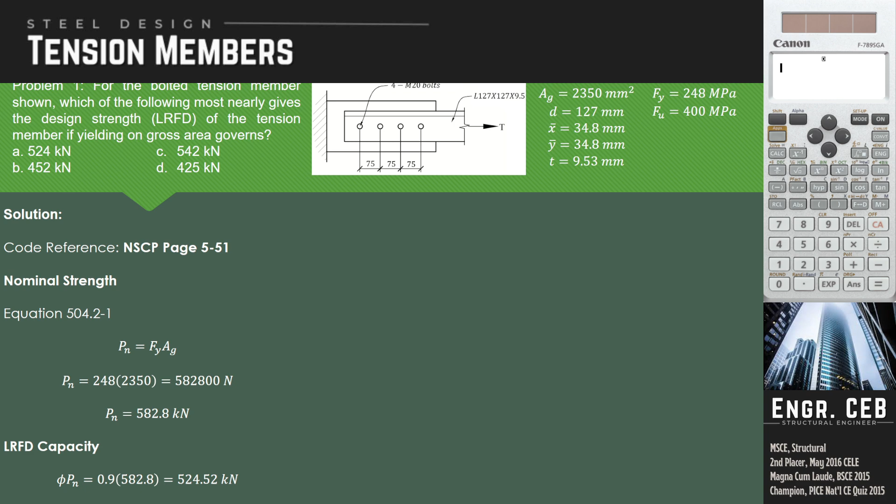So that is 582,800 Newton. We divide it by 1,000 to obtain the answer in kilonewton. This is the nominal strength. To get the design strength or the LRFD strength, we need to multiply this by the resistance factor phi, which is 0.9 for yielding on gross area. So 0.9 times 582.8 is 524.52 kilonewton, and that is letter A.

For the bolted tension member shown, which of the following most nearly gives the shear lag factor? We have a reference table where this will come from, and in determining the shear lag factor for this case, we will use case 2, and the formula is U equals 1 minus X bar over L. But there's a possibility that in the board exam this will be given.

The statement might say, use a shear lag factor of 0.85. X bar is the centroidal distance of the tension member towards the interface of the connection, so that is 34.8, given in the section properties of the tension member. Then L is the length of the connection, basically the distance between the extreme bolts in the line, from this bolt to this bolt.

The distance is 3 times 75, so that is 0.845333. For angles, we also have another applicable case, case 8A. For case 8A, the shear lag factor is given explicitly as 0.8 for tension members bolted with 4 or more fasteners per line in the direction of loading. We can see we have 4 bolts in the line, so the shear lag factor is 0.8.

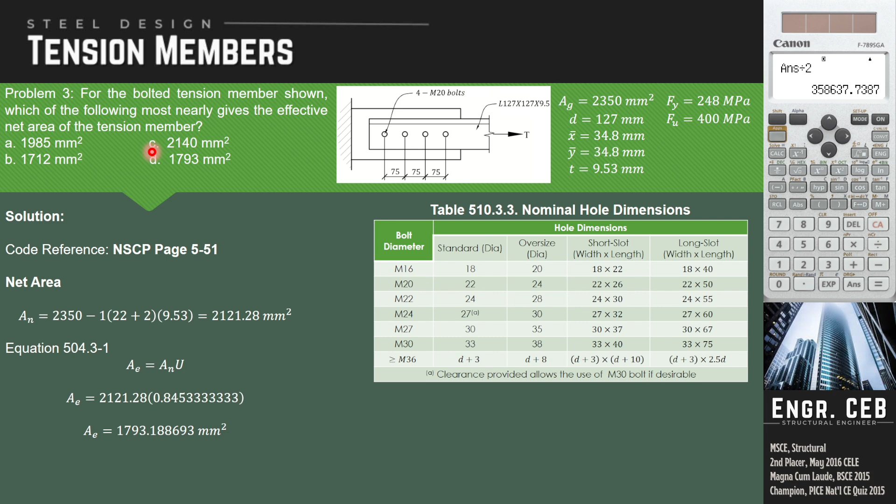So that is 2121.28, this is the net area. Ang question is effective net area, so pag sinabing effective net area, yun yung AE. Kaya ita-times mo pa yung net area ng U. So 2121 times the shear lag factor, that is 1793.188693 mm squared, and that is letter D.

After that, we can already determine the allowable strength for the fracture on net area. We just determine the nominal strength, so that is Fu times AE. So we will obtain 717,275.4773 Newton. After getting the nominal strength, we divide this by the factor of safety for tensile rupture or fracture on net area.

So that is 358.63 kilonewton, and that is letter A.

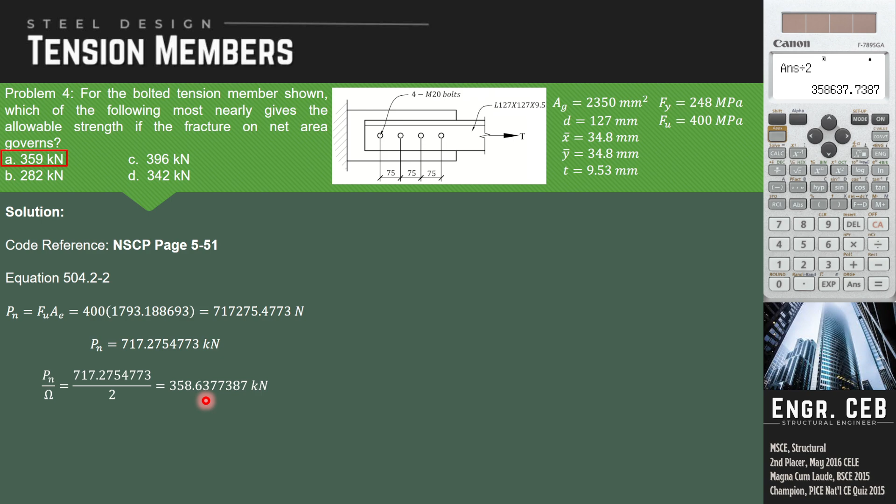Next, for the welded tension member shown, which of the following most nearly gives the shear lag factor? This will fall under case 2. But in determining the L, as you can see, magkaiba kasi yung length ng weld along the longitudinal direction natin. Dito 150, dito 100.

So in determining the L, we should get the average of 150 and 100, so we just get the sum, 150 plus 100 over 2, ayan, so 125.

And therefore we can now compute the shear lag factor, 1 minus x bar over L, so that is 1 minus 34.8 over 125. So the shear lag factor is 0.7216, okay, so that falls under case 2.

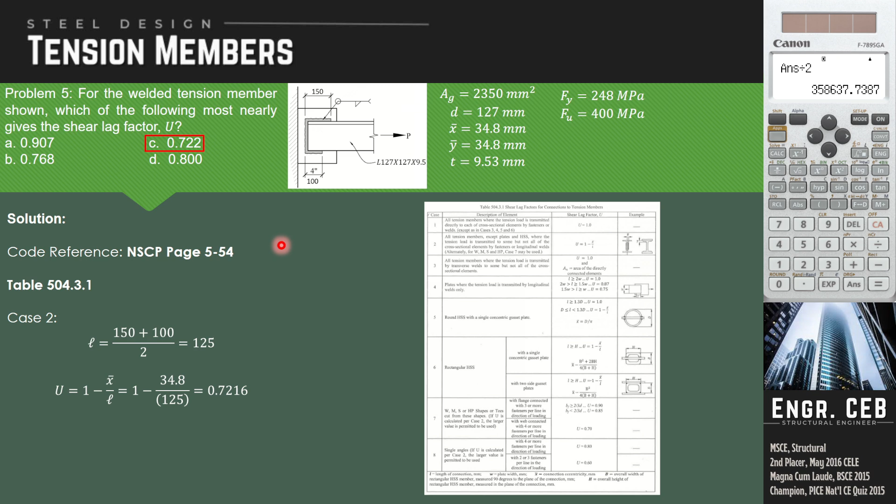Case 2 pa din, pero nag-iba lang from bolts naging welds. So after that, we can now determine the effective area of the tension member. So AN equals AG. Bakit kaya AN equals AG?

So kapag welds ang ginamit in connecting the members, syempre equal lang ang net area sa gross area kasi wala tayong bolts, so wala tayong holes na ima-minus sa net area. Kapag welded connections, AN is equal to A sub G.

So therefore we can now compute the A sub E. We just multiply yung nakuha nating shear lag factor 0.7216 dun sa ating gross area. And that is 1695.76, and that is letter A.

Then, since we already have the effective area, we can now determine the nominal strength based on fracture on net area. So that is FU times AE, tinimes lang natin yung ating AE sa ating F sub U.

And we obtain 678,304 Newton. So divided by 1,000, we will obtain 678.304 kilonewton.

Then after that, since LRFD yung pinapakompute, tatimes lang natin to na resistance factor for tensile rupture or fracture of net area. So that is 508.728 kilonewton, okay, that is letter C.

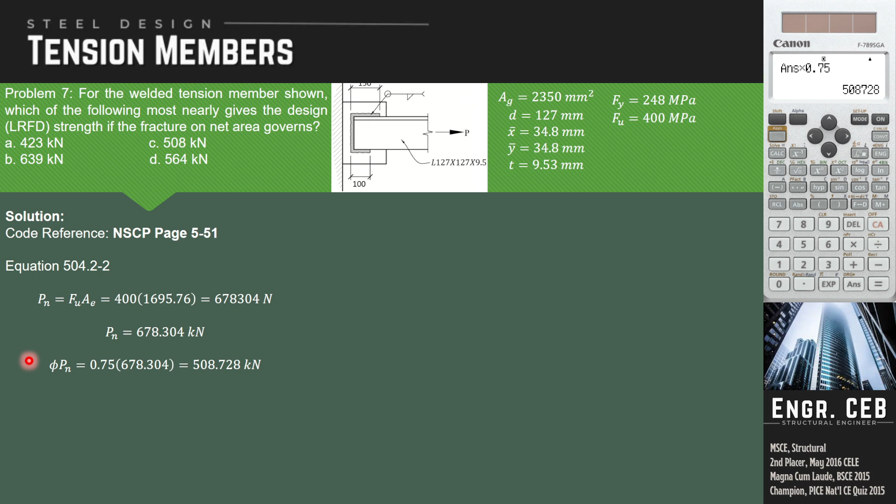For the welded tension member shown, which of the following most nearly gives the allowable strength of the tension member if yielding on gross area governed?

Same problem, but we have a different cross-section: a PL 10 by 125. By this time we should know how to determine the dimensions based on the name of the section. If we see this kind of name 'PL', it means the tension member is a rectangular plate with dimensions thickness and width. The numbers in the plate's name are its dimensions - the first number corresponds to the thickness, and the second number corresponds to the width of the plate.

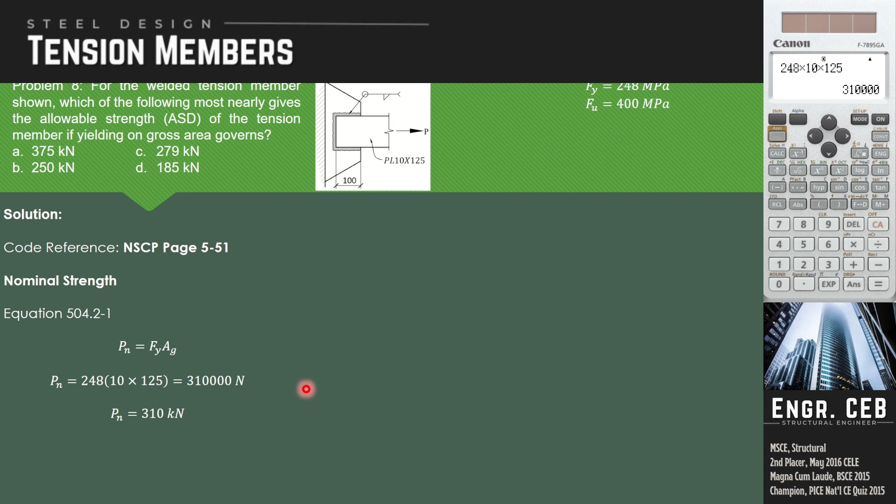So, therefore, in determining the gross area, we just multiply the thickness by the width, 10 by 125, then multiply by Fy which is 248. So 248 times 10 times 125 gives us 310,000, or in kilonewtons, 310 kilonewton. This is the nominal strength. To compute the allowable strength, we have to divide this by the factor of safety, which is 1.67. Therefore we have 185.63 kilonewton, and that is letter D.

Next: which of the following most nearly gives the allowable strength of the tension member if fracture on net area governs? For a welded connection, A sub N equals A sub G, so P sub N equals F sub U times A sub E. Again we have to compute for the shear lag factor since we need it in determining A sub E. But this is a plate.

For plates that are welded longitudinally and transversely, the shear lag factor is 1.0. So therefore we can now determine the nominal strength, which is simply the gross area - we don't subtract any holes since these are welds - times F sub U. So our nominal strength is 500,000. Then to get the allowable strength, we just divide this by the factor of safety for tensile rupture, which is 2. So the answer is 250 kilonewton.

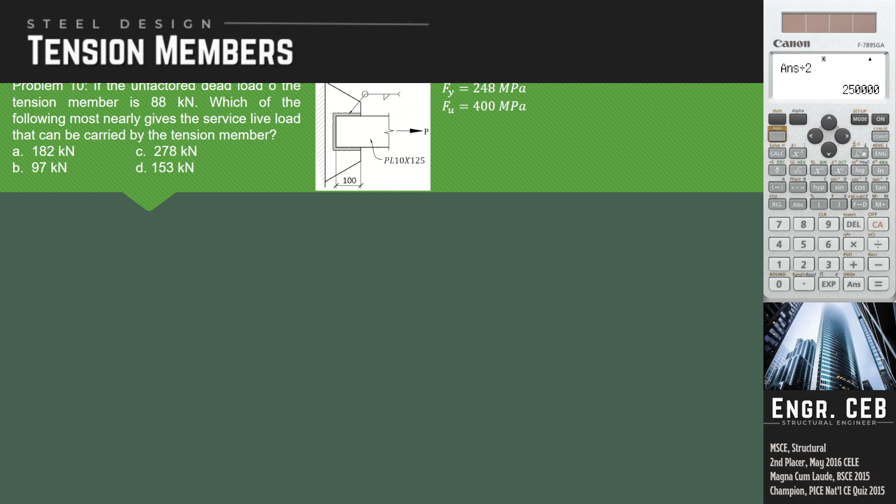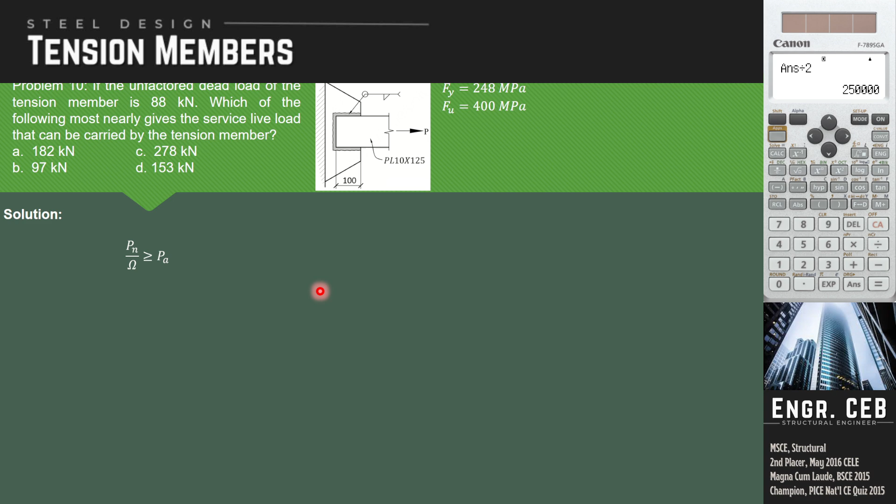Next: if the unfactored dead load of the tension member is 88 kilonewton, which of the following most nearly gives the service live load that can be carried by the tension member? In determining the demand that can be applied to our member, we have to compare the demand to the capacity. In this case we've already determined the capacity - 185. Take note, this is what we computed previously, based on yielding on gross area.

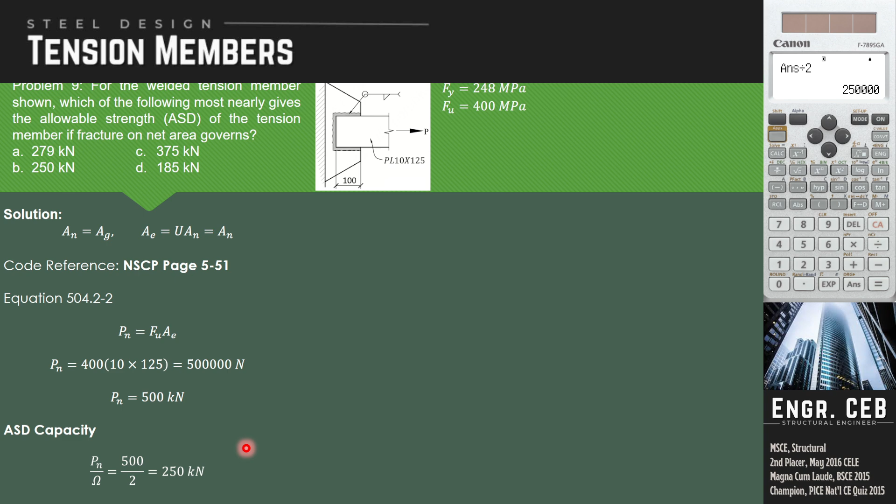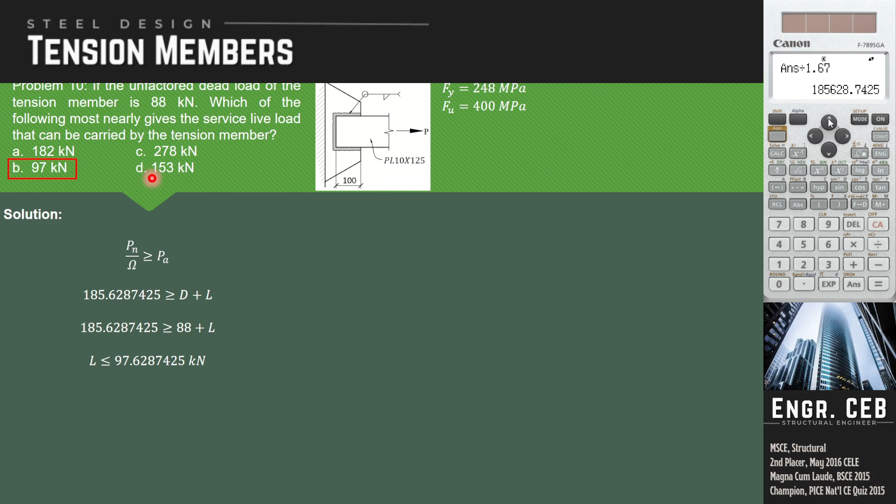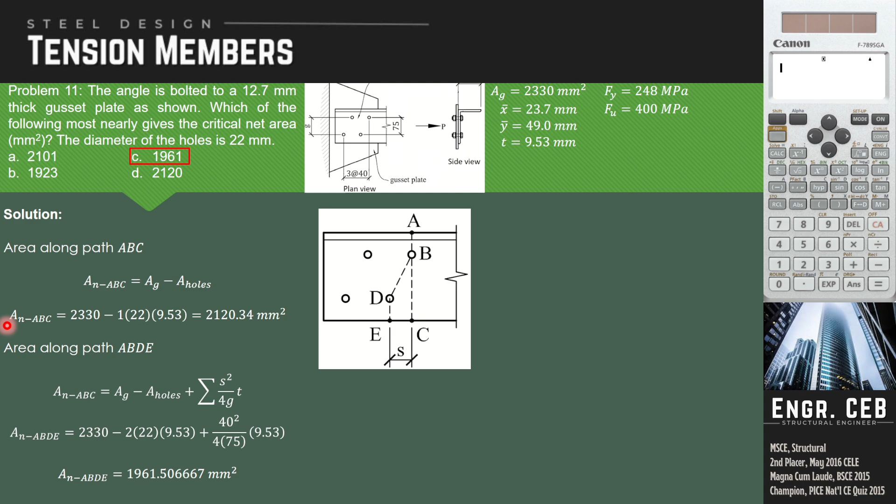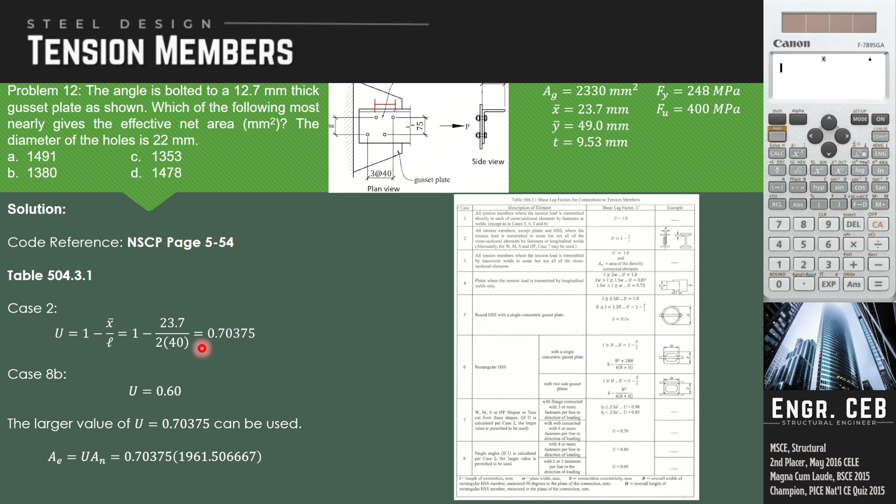0.70375 times natin dun sa na-compute nating net area na 1961. That is 1,380. Okay? And that is letter B.

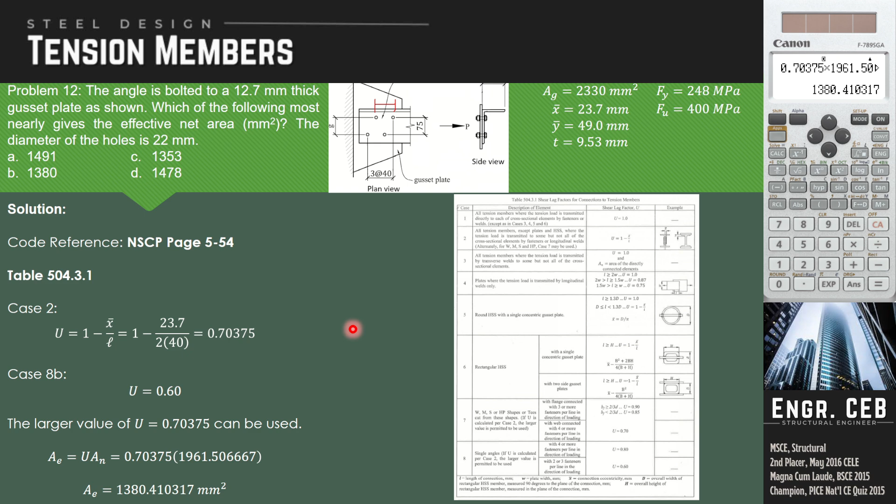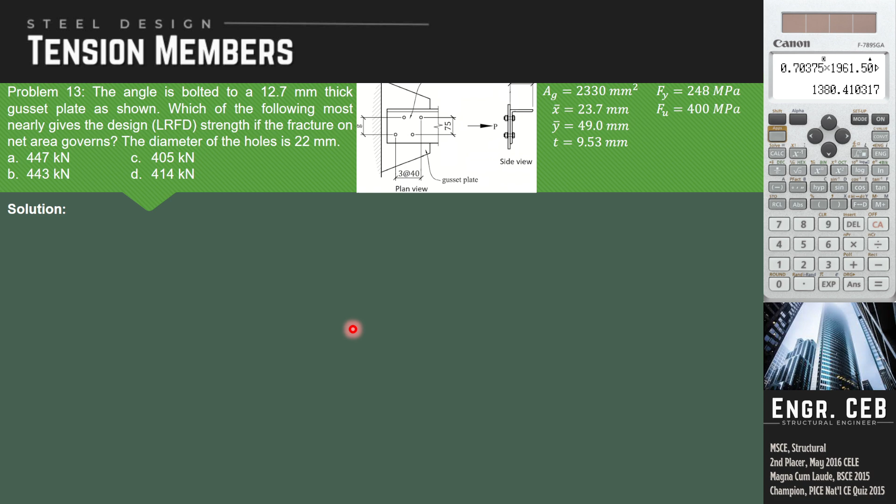Which of the following most nearly gives the design strength if the fracture on net area governs? So, we are asked to solve for the design strength. So, magko-compute tayo ng nominal strength. So, yung na-compute nating effective net area before, ta-times lang natin yan ng F sub U.

So, yung 1,380, ta-times natin sa 400. So, we have 552,164.1268 Newton. Okay, so after that, we can now multiply this by the resistance factor for fracture on net area, and that is 0.75. So we have 414 kilonewton.

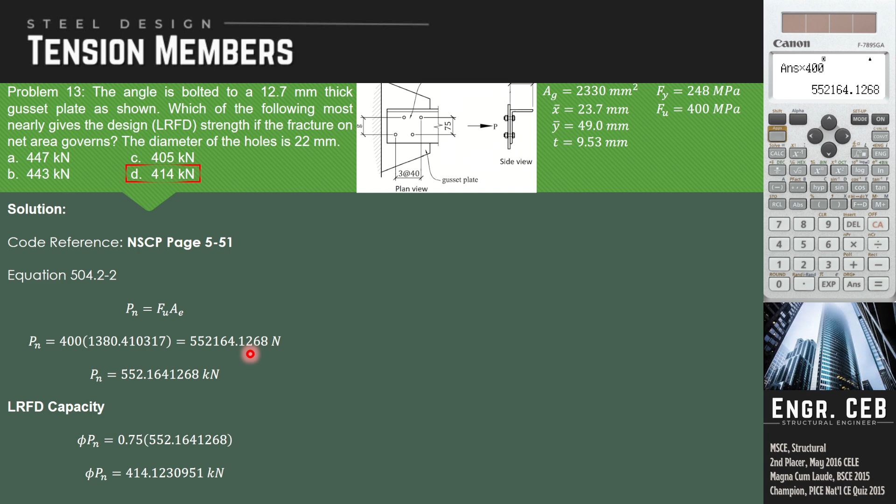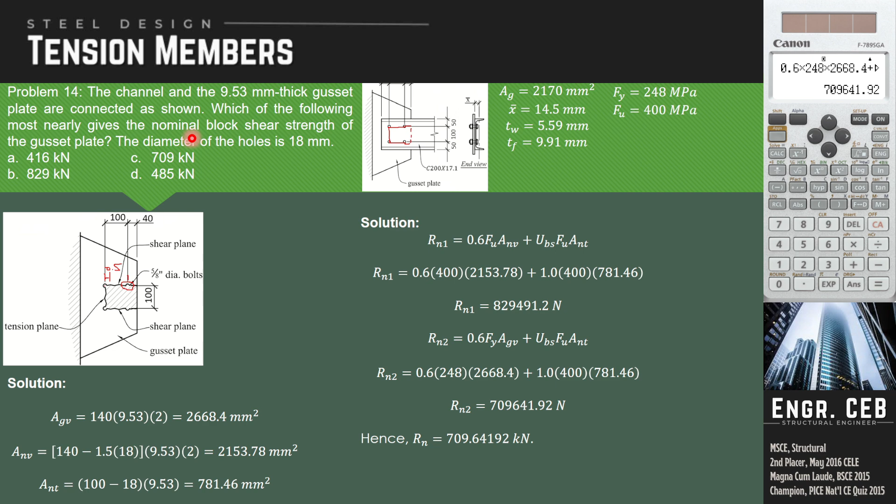Let us solve our second block shear strength. So for the second block shear strength, we have 709,641 Newton. And then we compare the two, of course the minimum will govern. That is 709.64 kilonewton. So that is the nominal block shear strength. And that is letter C.

Okay, so which of the following most nearly gives the nominal block shear strength of the channel? So for the channel, ito naman yung ating failure kapag block shear sa channel. Take note, magkaiba yon, magkaiba ang block shear sa gusset plate at magkaiba ang block shear sa channel. We have to be very careful about that. So yung block shear naman natin sa channel, ito. And then the procedure is the same.

Parehas lang yung procedure kasi kung makikita nyo yung distance, yung edge distance ng mga bolts is 40. Para sa channel, 40. Para sa gusset plate, 40 din. Ang mag-iiba lang is yung sa thickness. Sa thickness kasi ng gusset plate, that is 9.53. Sa ating channel naman is kung saan nakakabit yung bolt, so this is the web of the channel. Makikita nyo rin sa cross-section na yung bolt ay nakakabit sa web ng channel. So therefore, ang thickness na gagamitin mo is yung thickness ng web ng channel, which is 5.59.

Okay, so compute natin yung gross shear area. That is 1565.2.

Next, A nv, same procedure pa rin. Nag-minus tayo ng 1.5 ng holes. Ang talaga nag-iba lang kasi is yung thickness na gagamitin natin. So, for the net shear area, we have that is 1263.34.

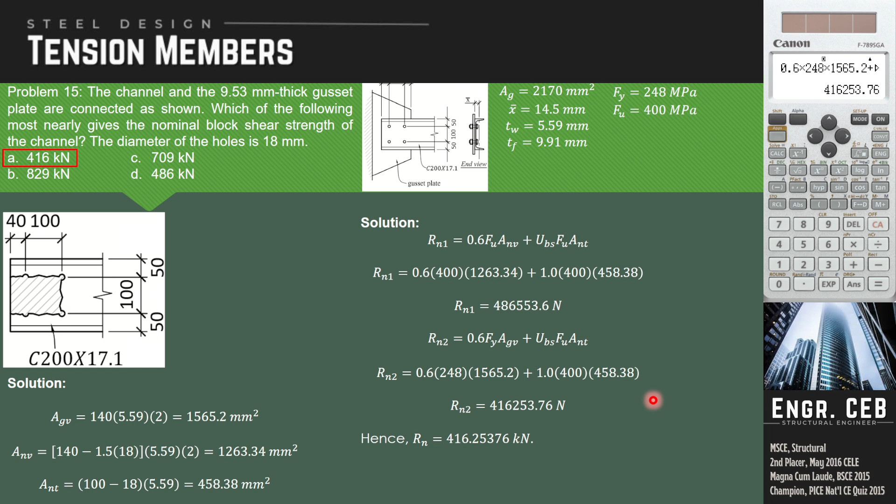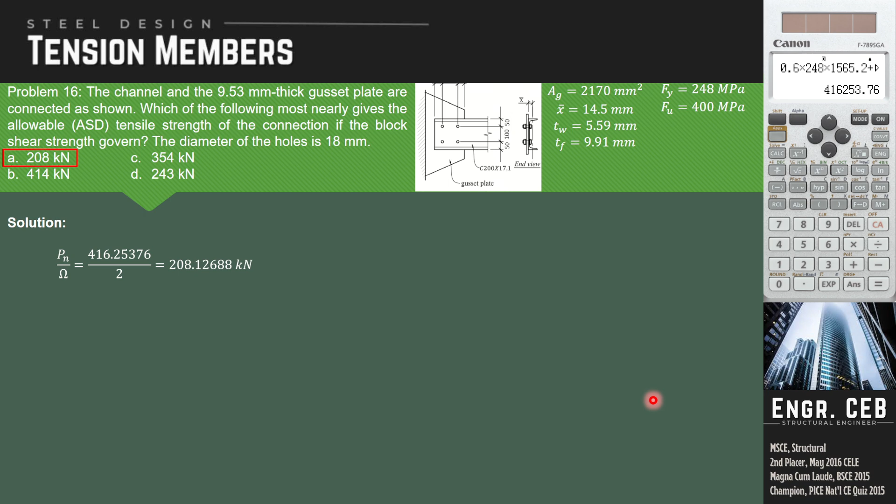Which of the following most nearly gives the allowable tensile strength of the connection? The block shear strength governs. Yung nakuha natin na 416, syempre siya yung pipiliin natin kasi mas mababa yung block shear strength ng channel compared sa gusset plate. So overall, ang pipiliin natin is yung pinakamababa. We just divide it by the factor of safety, so that is 208 kilonewton.

Okay, so let us now proceed with compression members. Which of the following most nearly gives the critical slenderness ratio of a 6.096 meter long column pinned at both ends? For the slenderness ratio, that is simply KL over R. We have to compute the slenderness ratio in both axes, and then the critical slenderness ratio is the larger between the two. So compute lang natin.

Kapag pinned ang both ends ng column, ang K natin is 1.0. That is how you determine the K. Pero usually sa board exam, binibigay rin ng examiner ang K. Sinasabi niya explicitly, K equals 0.8, K equals 1.0, K equals 0.5. But of course, we should still know how to determine the K. So for pinned at both ends, ang K natin is 1.0.

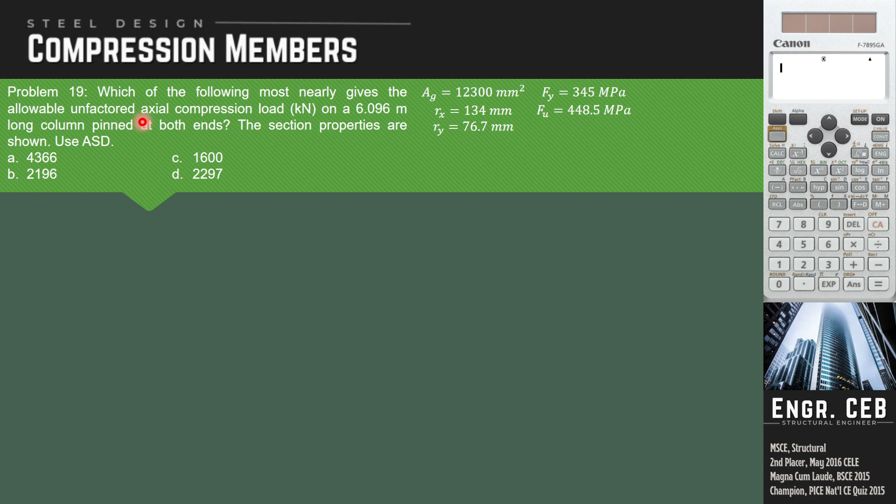Next, which of the following most nearly gives the allowable unfactored axial compression load on a 6.096 meter long column pinned at both ends? Kapag unfactored axial compression load, parang tinatanong niya yung service load na pwede nating i-apply sa ating column. Ibig sabihin, ASD yung gagamitin na code. Although sinabi rin dito use ASD, pero pag sinabing unfactored axial compression load yung pinapahanap, ibig sabihin ASD yun. Ngayon, before we can compute this, dapat makompute muna natin yung nominal strength.

In determining the nominal compressive strength of the column, we should divide first yung Fy over Fe. So divide natin yung Fy sa Fe, that is 1.104049493. Ngayon, yung value na to, kapag less than siya ng 2.25 based on the code, ang formula natin ng FCR is yung 0.658 raised to Fy over Fe times Fy.

Don't worry, given naman itong kompletong code sa board exam. At saka usually minsan hindi code ang ginagamit niya, ang binibigay ng examiner is table of stresses. Ano ibig sabihin ng table of stresses? Yung isang question ng examiner, after mo ma-determine yung slenderness ratio, meron siyang table kung ano yung gagamitin mong allowable stress, nakatapat siya sa mga value ng slenderness ratio. Ibig sabihin, hahanapin mo lang yung slenderness ratio na na-compute mo sa table, tapos titignan mo yung katapat na allowable stress. Pag hindi mo nakita yung ginamit mong slenderness ratio, ibig sabihin you have to perform linear interpolation lang naman para ma-compute mo yung allowable stress.

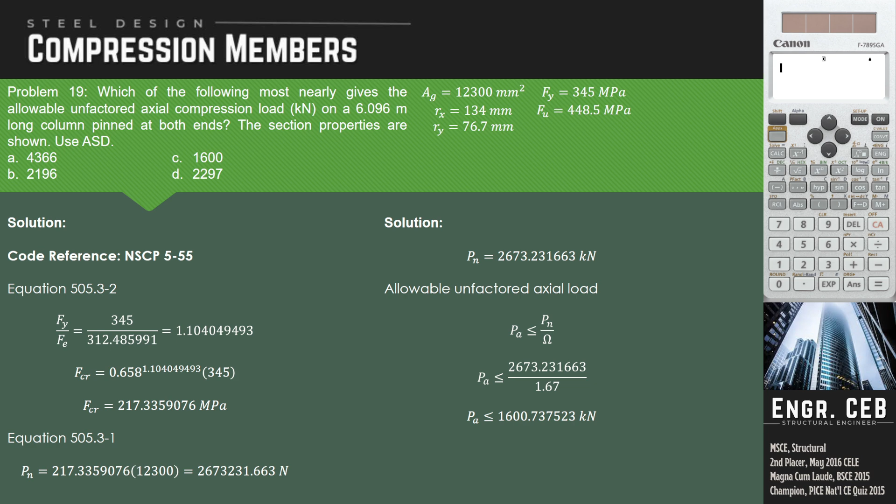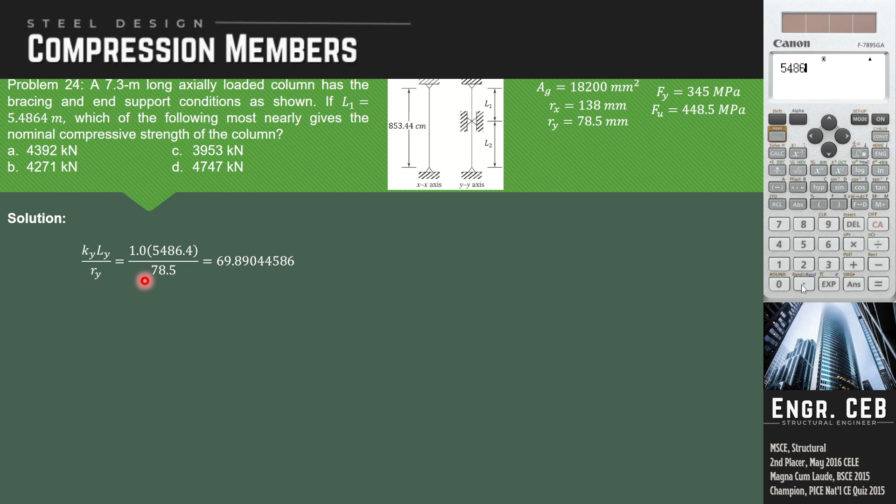Let me verify the computed value. So that's 69.89, okay?

After computing KL over R, we substitute it in determining FE. So Fy over Fe is less than 2.25. Therefore, the formula for FCR to be used is 0.658 raised to Fy over Fe, times Fy. So FCR is 241.

Now we can determine the nominal compressive strength of the column. We just multiply that by the gross area. So that is 4392 kilonewton.

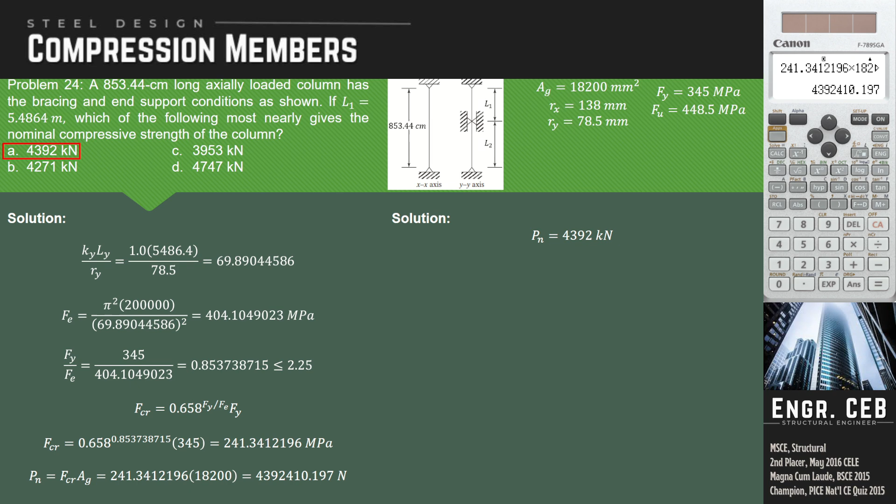Next, which of the following most nearly gives the limiting laterally unbraced length for the limit state of yielding? So we're done with compression members now - we're on flexural members.

For the limiting laterally unbraced length, remember there are only two limiting laterally unbraced lengths for our limit states. First is for yielding, that is L sub P. So in this problem, that's what we need.

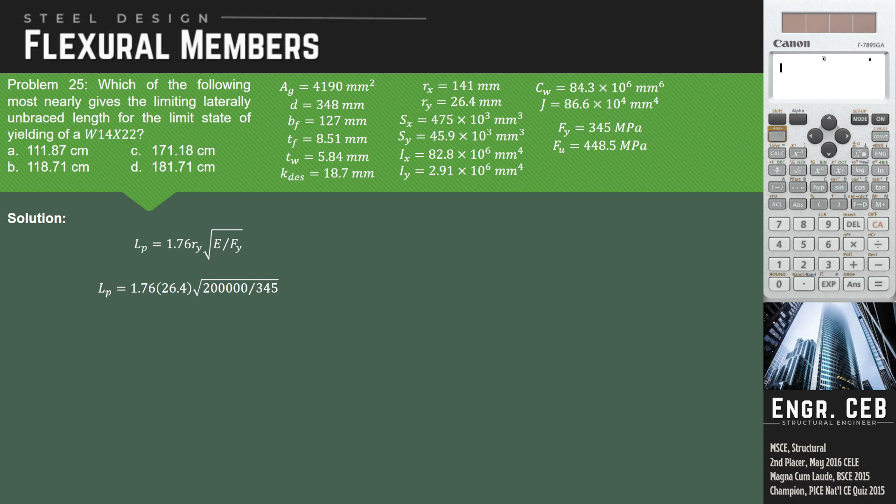So what's our formula for L sub P? It's 1.76 R sub Y times square root of E over Fy. Actually this formula is also given in the board exam, though brief. It's simple, just substitute into the formula. Just be careful because you need to use Ry.

There are many radius of gyration values that can be given - three of them: radius of gyration with respect to X, with respect to Y, and the effective radius of gyration, which is R sub TS. So be careful with this formula - the R sub Y we use is the radius of gyration with respect to the Y axis, 26.4. So that is 1,118 millimeters, or in cm, that's 111.87.

Remember, that's called the limiting laterally unbraced length for the limit state of yielding.